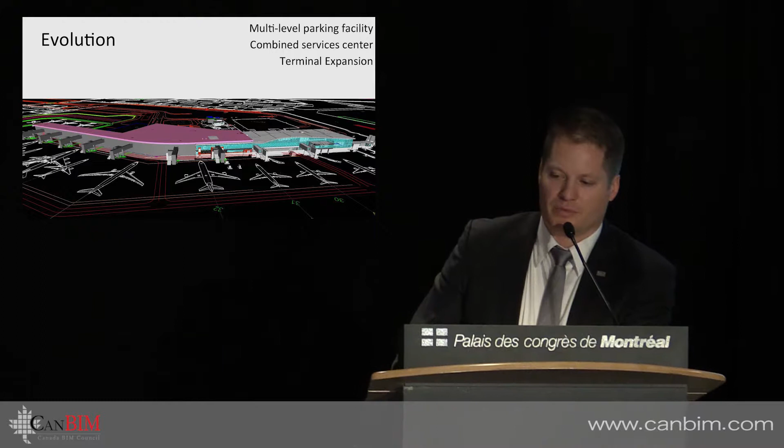Our first project was a multi-level parking facility. We experimented with different 3D tools. The architect had done a SketchUp. We hadn't asked initially for much, simply to present a SketchUp, and then internal partners really realized to what extent visualization was an incredible tool.

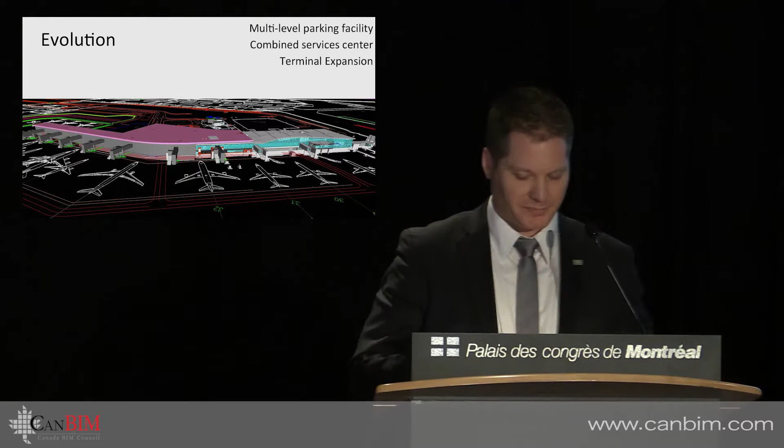Parallel to that, we did a combined technical services center along with a firehouse. So we asked for a Revit model at that point. It was as simple as that. At the same time, it was a good tool for us to understand how the market behaved, and it was a good learning for us, and it made it possible for us to prepare later projects.

The biggest project of our history at the Quebec airport is in the planning and design phase, which is the terminal expansion. We're adding 7 loading bridges, a more than $100 million project. It's a pretty big project, $100 million construction cost.

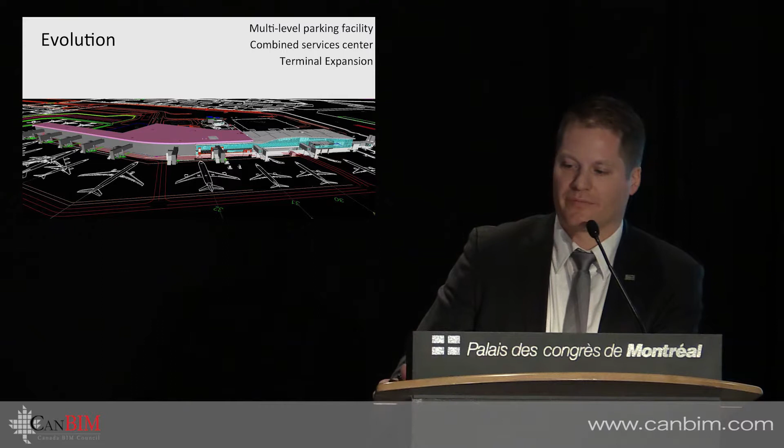So we decided to really go all out, in order to better control our costs and the deadline as well. We started with what was pretty much a vision that we had.

I started selling the idea to higher management. It was easy because the president and vice president already had presentations on BIM and the advantages of visualizations. So it was fairly easy for me to sell it.

What I started doing initially was a strategic organizational plan. What do we want to do with that? We set 5 strategic goals within the organization. I was doing a lot of projects within the airport as person in charge of services, so I knew where our weaknesses were, and I started from the weaknesses to determine what the project optimization projects would be.

The first one was visualization for better comprehension. We saw it earlier, and I think everybody agrees with that. It's not easy to understand the project in 2D, even in 3D sometimes if the models are not as detailed in terms of materials and all that.

So imagine for someone who doesn't work with projects to look at it on a 2D piece of paper, quite hard. What we also wanted to do is increase coordination, because we always want projects done more and more quickly, and people would work in isolation even if they're close physically to each other. It was usually more done step by step. So we wanted to improve coordination because often we don't leave a lot of room for design, as our deadlines are usually pretty tight. How could we improve coordination? That's one of our strategic goals.

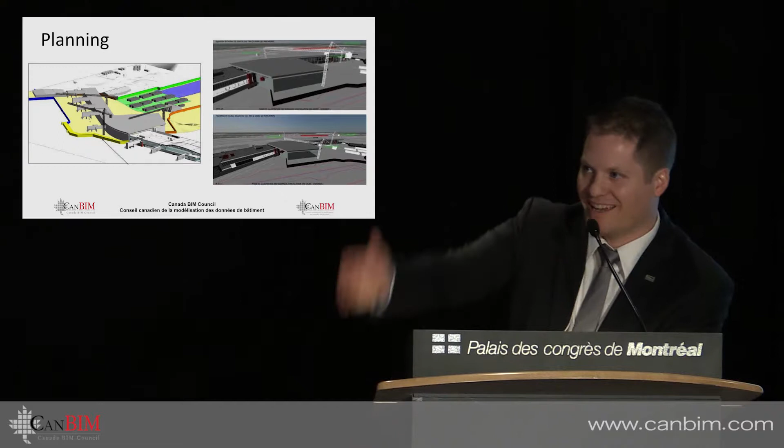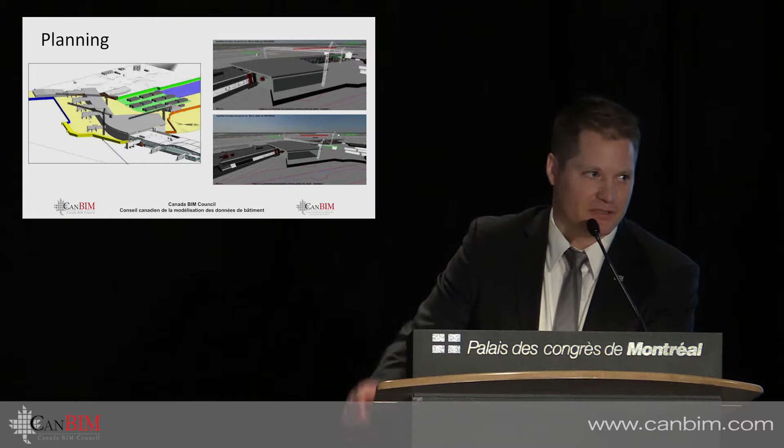Well, so there are people here who are going to be happy. So we use it in planning. What's important for us is the visibility of the control tower, of the planes that land. So we had difficulty expressing how we would position cranes on the field, and explaining to people from Transport Canada and so on that we were analyzing the situation in detail to show them the options of positioning of cranes. It was very easy to communicate our intention with that.

When I was speaking of innovating culture, I mean, at the Quebec Airport we're a small gang of techno fans with our watches connected to the phone, that kind of thing. So we tried something recently. We married the world of construction with the world of video games. And we just completed a preliminary phase here.

We use concrete 3D models in conception and design. We export them into a video game format while optimizing, let's say, the dimension of files. And it's with an automation of texture management that we developed with a Quebec company called Cortex Media, which does all kinds of applications.

We developed a process so that within a few days we can take a model version and bring it into a 3D visualizer, with the viewer right in front of our eyes, and you really feel you're inside the infrastructure. You can really visualize what's going to happen. It's easy to see in 3D, but when you're in it, that's another dimension.

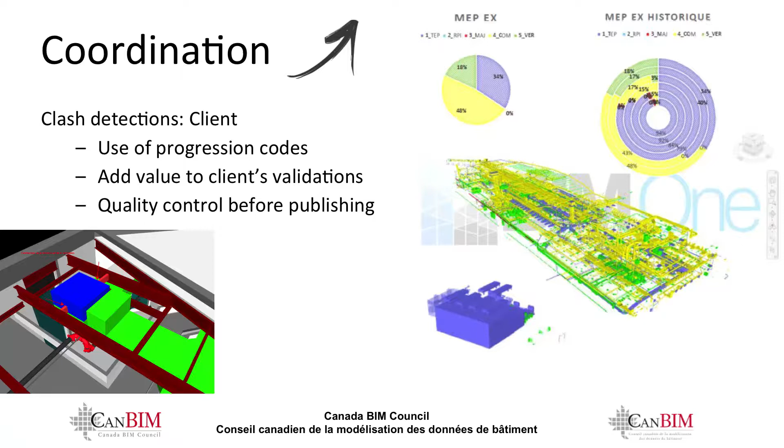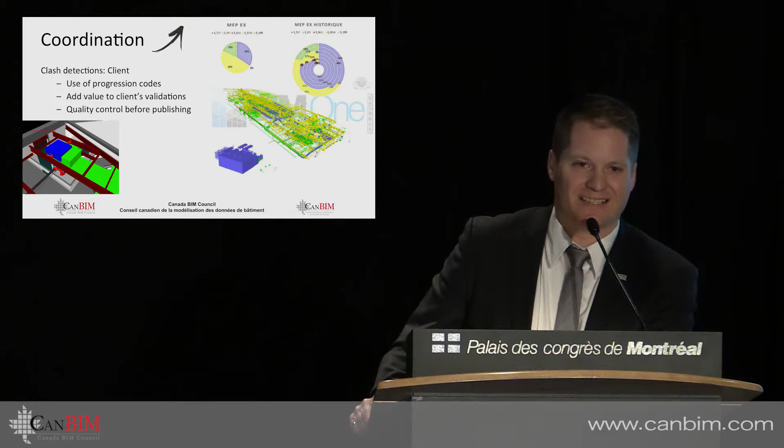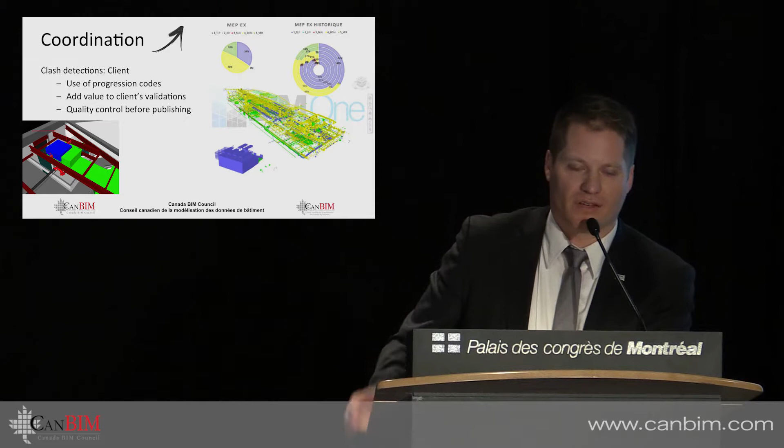What you see on the right is a report of progress. We had progression codes in the model. These progression codes make it possible for professionals to communicate certain information, for us to see the progress of the modeling, and when we do clash detection at the end, that we don't do clash detection among elements that are ongoing or not completed. So I see it as a client control before we start. It's not easy to do on a 2D plan when you haven't been involved in depth. And with this interference matrix, we can do a final checkup in terms of quality.

Our vision, well, is because we do have professionals. We work in project office with project managers. We do call for tenders by lot. So, while the design is still very preliminary, what we wanted to do, we didn't want all of the coordination that is done in design to be redone on the site, because I mean, if we use models

and do coordination, then we don't force the contractors to do a minimum of what we've asked for. I mean, we're going to spend money in coordination for nothing. So the idea here, and in our case, it works fine. It's a design that is very close to the construction.

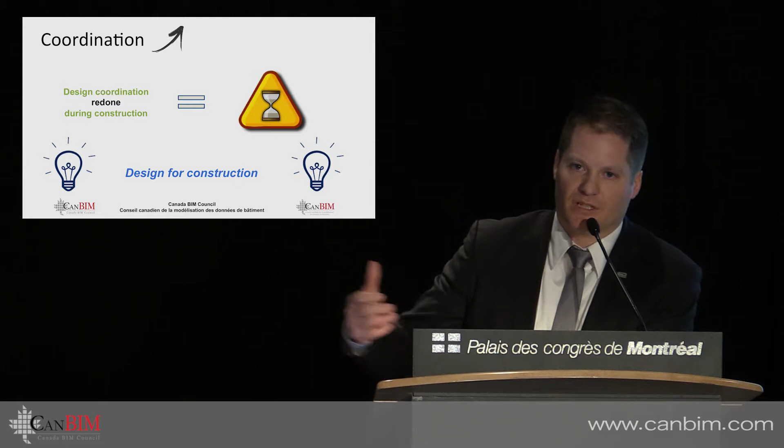And what we're going to do, because we started the first few temporary lots, but we wanted to have matrices of federated models where we can compare. But at the end, what I need really is a design model that has evolved.

How do we do scope control for the program? Well, all the technical data sheets. The idea was to put it all in a database. That database makes it possible for us to write up reports. Now we used CodeBook as a database.

We would save that way all our technical sheets and our needs, our equipment that we provide as a client. We modelize that, and that is put into the database and referenced, so that when that database is connected to Revit in this case, because we decided we would standardize with the use of Revit, the synchronization can be done, so the two systems can talk to each other.

Then we can pull out validation reports that the design is going according to the program of needs with very interesting precision. So there's a cycle, an osmosis between this CodeBook and the database and Revit throughout the project.

With regards to quantification, well, it's for cost assessment, both in design and for tender bids. I think a 3D model gives us an interesting precision level and also a quicker cycle if the integration is properly done with people from the estimate department.

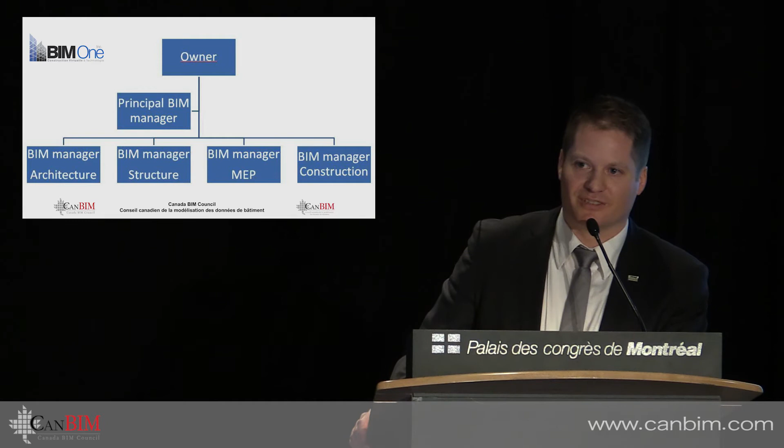So for myself, the client's place, well, it's strategic planning, but a flexible one. You can't put too many shackles on yourself. You need to be able to react quickly, and you need to be focused on the project objectives. A client in BIM, I mean, a lot of fun tools. You can really trip on it, lots of things you could do, but maybe it doesn't meet our objectives. Might meet others, but not the ones we've set out. Maybe secondary objectives, not the primary ones.

The client, in my vision, in order to reach success, is a mediator between divergent interests. If we put professionals together, one will need the information that the other one doesn't want to give, and the other will say, "Oh, I never gave him that information." So we become a catalyst, a mediator, where we can better impose deliveries and ways of collaborating among partners.

It requires an active participation. I think you need to be there on a daily basis, constantly, because people in the team pretty much turn to us to get our feedback, and that's very important to be able to give it as quickly as possible, even if it's not easy.

We decided to support also different maturity levels in the team to level off the different BIM maturity. We held some training sometimes, and we came up with tools such as point cloud. It's just a little refresher sometimes, to make sure we're all on the same level. And we do verification and quality control. It's our responsibility.

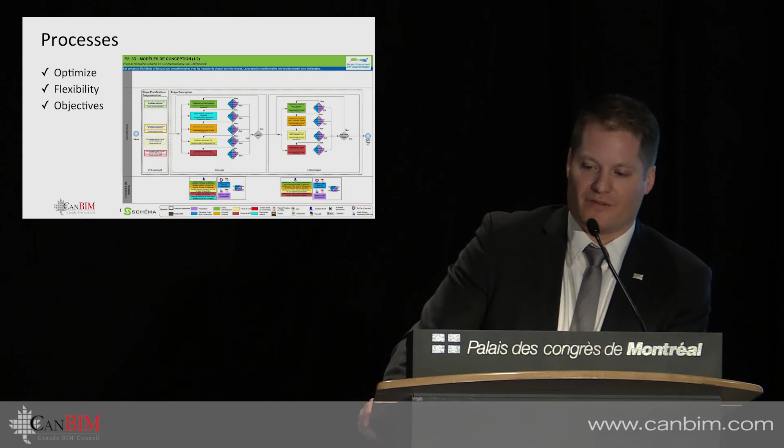We did it with the Schéma group in order to optimize our projects, but while maintaining flexibility in reaching our objectives. We are also preparing certain contractual documents, but I think what's important is to clarify the mandates as much as possible. And that goes through management plans, but also sharing of information. It's important to put that in contractual documents.

Confidentiality, author rights, and intellectual property. And I can understand also that when we develop content, when it costs many thousands of dollars to develop, we can be rather sensitive. We want to use reference documents, IBC, as an addendum, the Institute for BIM Canada, IBC.

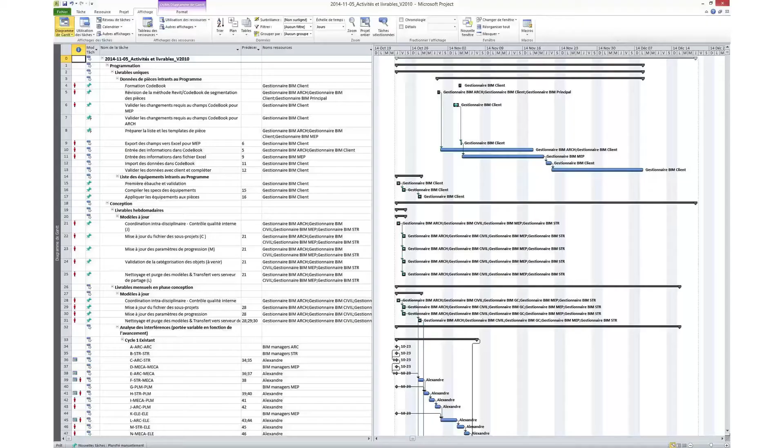So when we speak of processes, we try to determine the list of deliverables. We had a list that we wanted to put into a deadline process as soon as possible. But the idea was it was important to have the same understanding of what we're doing.

Something that we do within our project are the APIs. We have little applications that we provide to all the project teams to make sure we reach our objectives. Clash sphere generators to detect clashes. We developed an import-export shared parameter module and a few other little ones.

Well, what are shared parameters? Well, they're the ones that we establish as being important for the project. Uniformat codes, MasterFormat, and construction phases. Here, the professionals don't need to play with that information, but we reuse their model to come and attach information. We tried not to lose the work that was already done.

Okay, I wanted to reassure everyone it doesn't come out of nowhere to work in BIM, and everything is not magically easy. I think you need hours and hours. The theory of 10,000 hours put out by Anders Ericsson, saying you need at least 10,000 hours to start becoming good at something.

And I think that the bigger ones, whether it's Bill Gates or Mozart, these are people who've put a lot of hours into what they're passionate about. And to me, that's the key of success. You need the time and you need elbow grease.